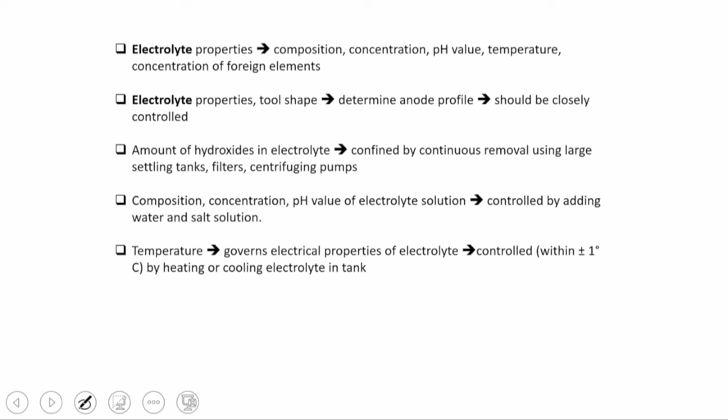So to maintain the constant material removal rate, spacing between the electrodes should be maintained. To maintain the spacing, the cathode moves towards the anode at the same rate at which the machining from the workpiece occurs. Okay, so spacing between the electrodes should be maintained constant. Cathode moves towards the anode at the same rate at which work is being dissolved. Smaller inter-electrode gap results in high current density, which will result in high material removal rate. The selected electrolyte should be inexpensive and easily available; the commonly used electrolyte is sodium chloride.

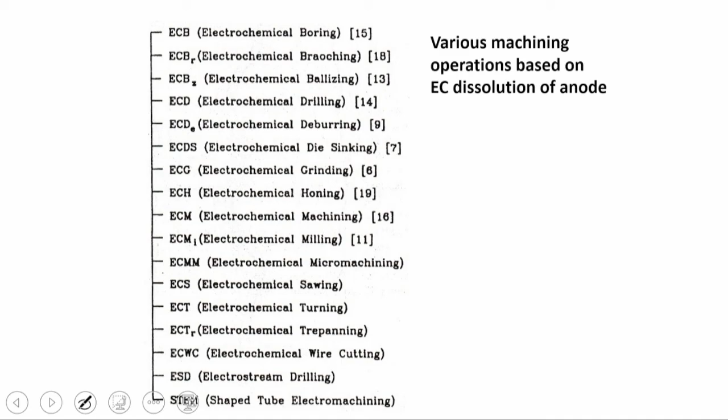Electrochemical milling operation is another process. Electrochemical sawing, electrochemical turning, electrochemical trepanning operation, electrochemical wire cutting operation, electrochemical drilling operation, shaped tube electrochemical machining for high aspect ratio holes. So these are the various machining operations which are obtained by using electrochemical machining process.

So now what are the different components of the ECM process? The first component is the power supply, or power source, of this electrochemical machining process. Then the electrolyte supply and cleaning system is the second element of this process. The tool and tool feed system is the third component of the process. And the workpiece and work holding device system is the fourth component of the process. Now we shall discuss the different elements of the process one by one.

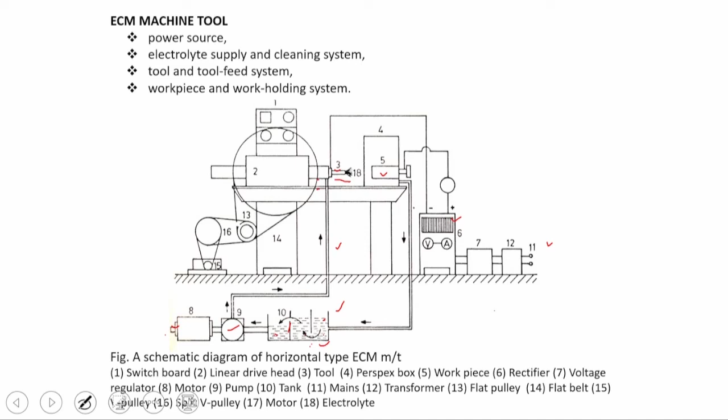Then from the first to the second chamber, there is a filter placed here. Now from the second to the third compartment, it will go through another filter, and at the exit of this filter, it will go to the pipe connecting to the electrolytic chamber.

So electrolyte cleanliness is required to maintain the smooth flow of electrolyte and to avoid blockade of the inter-electrode gap by particles carried by the electrolyte. Electrolyte cleaning is normally done with the help of filters made of stainless steel or any other anti-corrosive material. Filters are periodically cleaned for their proper functioning.

Filters can be placed in the supply pipe just prior to the work enclosure to achieve good results. The piping system should not introduce any foreign materials like corroded particles, scales, or pieces of broken seals. Piping systems are made of stainless steel, glass fiber reinforced plastics, plastic lined mild steel or similar other anti-corrosive materials.

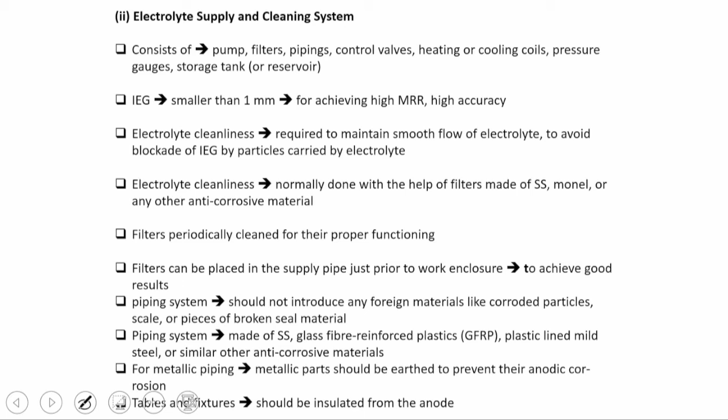For metallic piping, metallic parts should be earthed to prevent any anodic corrosion. So any metallic part should be earthed. Table and fixture should be insulated from the anode. The minimum capacity of electrolyte is 500 gallons for each 10,000 amperes of current.

A single tank system is not recommended because of loss of time and wastage of electrolyte during draining, cleaning, mixing or filling of new electrolyte in the tank. It results in higher cost, poor accuracy of electrochemically machined components and poor control of operating conditions. Concrete tanks or swimming pool type tanks are preferred because of their low cost, easy maintenance and reliability.

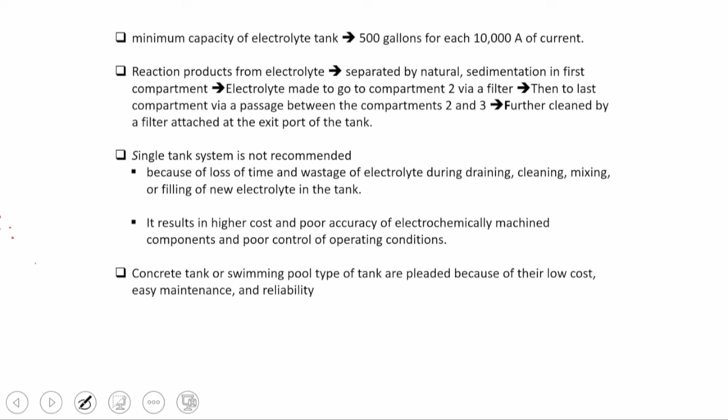Tool and tool feed system: the tool is fed towards the workpiece because material removal is due to the anodic dissolution of the material. So you have to feed the tool towards the workpiece at the same rate this anodic dissolution is going on. Tools and fixtures should be made of anti-corrosive material to work for a long period of time in the corrosive environment of

electrolyte. Tool material should have high thermal conductivity, high electrical conductivity and easy machinability, as it directly affects workpiece accuracy and surface finish. Very soft materials are used for the tool in ECM because there is no wear of the tool material. So aluminum, brass, bronze, copper, carbon, stainless steel and monel are the materials used as tool material.

Insulation of the tool is required. Those areas of the tool where ECM action is not required are insulated. Lack of insulation on the sides of the die sinking tool causes unwanted machining of the work and results in loss of accuracy of the machined workpiece. So which type of tool can be recommended? Either these tools may be coated to remove the unwanted metallic dissolution at the side of the workpiece, or you can use a bit type tool.

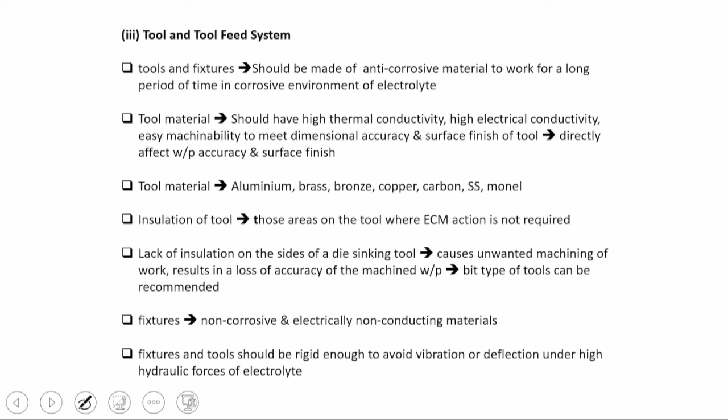You can see this is the bare tool, this is the coated tool, coated outside, and this is the bit type tool. This is the perspex body. Here a through hole is there, and through this hole the wire is coming inside at the bottom surface of the bit. There are different zones: 5 is the stagnation zone, 6 is the front zone, 7 is the transition zone, 8 is the side zone, 9 is the tapered side, and 10 is the tool bit.

Here you can see the bit type metallic tool is attached. This is non-conducting material, this is the conducting material, and it is attached to the non-conducting material using this kind of thread. As this portion is made of perspex, a hole is made inside the perspex, and this titanium electrode is inserted and it will touch the tool bit.

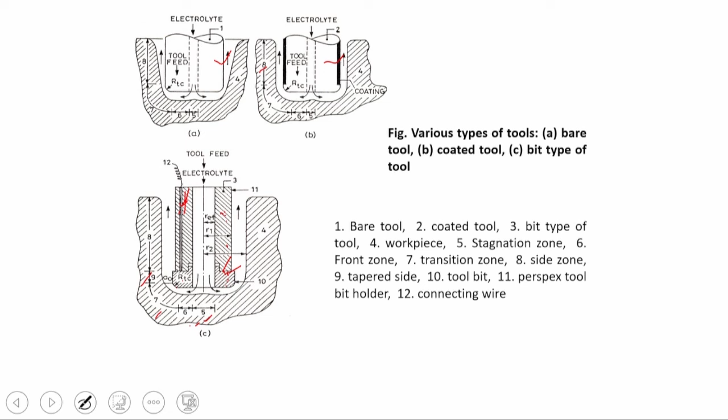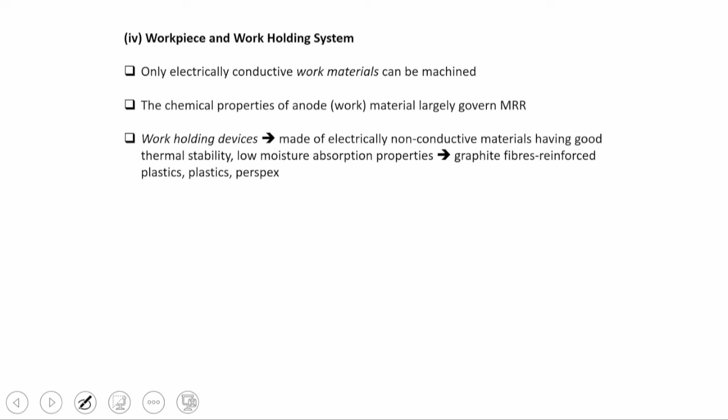Workpiece and work holding system: only electrically conducting workpiece materials can be machined. The chemical properties of the anode material largely govern the material removal rate. Work holding devices are made of electrically non-conducting materials having good thermal stability and low moisture absorption properties, such as graphite fiber reinforced plastics and perspex. These are used for the workpiece and work holding system.

So what are the advantages? It can machine highly complicated and curved shapes in a single pass. Tool life in ECM is very high because practically there is no tool wear, so a single tool can machine a large number of workpieces. Machinability of the workpiece material is independent of its physical and mechanical properties. Low scrap rate, reduced inventory expenses, almost automatic operation, and low overall machining time.

It can machine only electrically conducting workpiece material. These are the disadvantages; a few limitations are there for this process. It can work on electrically conducting material, but for electrically non-conducting material this process is not suitable.

So machined component accuracy depends on the tool design, degree of the process control imposed, and complexity in the shapes produced. So machining of materials consisting of hard spots, inclusions, sand and scale that are present presents some practical

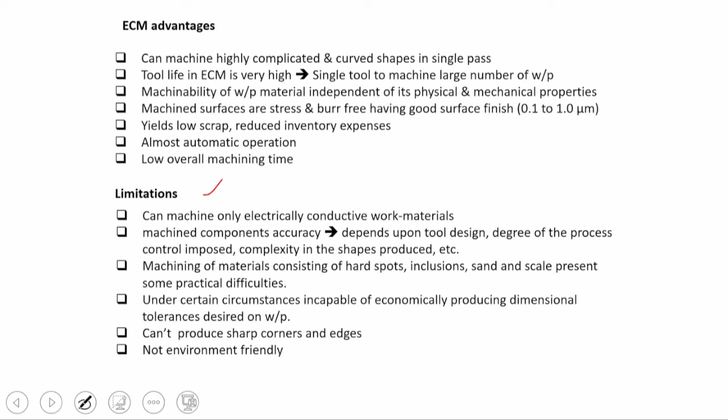difficulties. Under certain circumstances, it is incapable of economically producing the dimensional tolerances desired on the workpiece, cannot produce sharp corners and edges, and is not environmentally friendly, because chemicals are used. Also, sharp corners and edges cannot be produced in the case of the electrochemical machining process.

So what are the applications of the ECM process? It is used for machining very hard materials, high strength temperature resistant materials. Also it is used for machining very complex contours on the workpiece surface, which is not possible with conventional machining processes. So machining of hard and tough materials, especially with complex contours.

ECM is used for turning, trepanning, broaching operations, grinding operation, fine hole drilling operation, die sinking operation, piercing operation, deburring operation, and plunge cutting operation. So many operations can be done by this ECM process. So it is widely used in industries. Commercial machines are available in industry.

So it is used in aeronautics, nuclear technology, space vehicles, automobiles and turbines. These are the industries where ECM machines are extensively used. Typical ECM applications: it is used for machining of turbine blades, which are made of high strength temperature resistant material. You can see that on turbine blades there are so many complex surfaces. How to machine them by normal conventional machining processes?

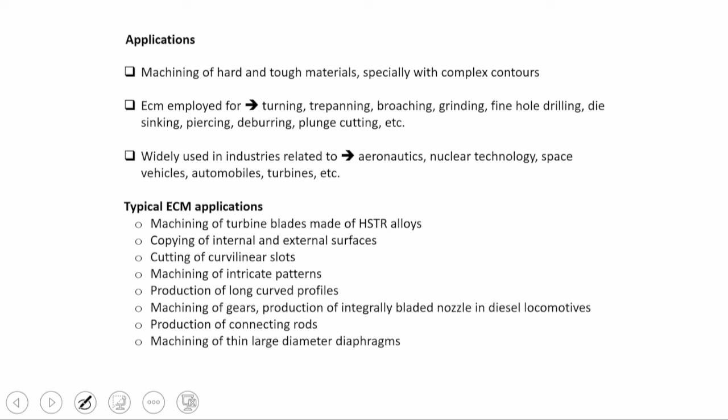Machining of gears, production of integrally bladed nozzles in diesel locomotives, production of connecting rods, machining of thin, large diameter diaphragms. These are some applications of the electrochemical machining process.

So now, what will be the mechanical properties for this ECM process? In conventional machining processes, you know, compressive residual stress is generated. Because of this compressive residual stress, the fatigue life of the workpiece is increased. Okay. So in the ECM process, hydrogen bubbles are generated, so there may be chances of hydrogen embrittlement in the workpiece surface.

But we have discussed that hydrogen gas is generated at the cathode surface, not at the anode surface. The anode is basically used as the workpiece. As it is not generated at the anode, there is no chance of hydrogen embrittlement in the workpiece. So no effect on ductility, yield strength, tensile strength, ultimate tensile strength, micro hardness. These things do not change in the ECM process.

These mechanical properties like ductility, yield strength, ultimate tensile strength, micro hardness do not change in the workpiece surface. Surface layers damaged during conventional machining can be removed. So what about the surface layers? I told you compressive residual stresses are generated, and because of this, in conventional machining the outer layer becomes very hard. Okay. So this surface layer damaged during conventional machining can be removed by the ECM process.

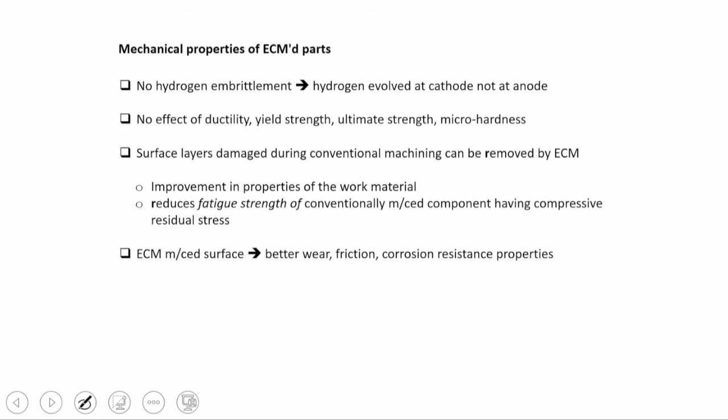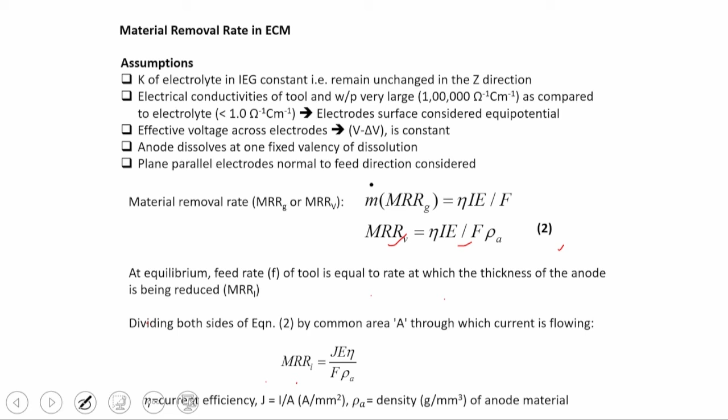Now linear MRRL equals the penetration rate or rate of change of the inter-electrode gap, or you can write this one as dy/dt. So in this equation you can write MRRL equal to dy/dt, minus f. So dy/dt, the linear material removal rate, on the right hand side is J E eta by F rho, which is already there.

Now during ECM, the tool is moved towards the workpiece at a rate of f millimeter per second. So the effective rate of change of inter-electrode gap is given by dy/dt equal to J E eta by F rho minus f. Now for the equilibrium condition, dy/dt equals 0. So you can write for the equilibrium condition J E eta by F rho minus f equal to 0, because there is no change in the inter-electrode gap at equilibrium.

So you put it as 0 here, and it becomes J E eta by F rho equal to f, the feed rate. Now put J as V minus del V into K by Ye, where Ye is the equilibrium gap. Put it in E eta by F rho equal to f, and after simplification you will get the equilibrium gap. So this Ye is the equilibrium gap between the tool and workpiece.

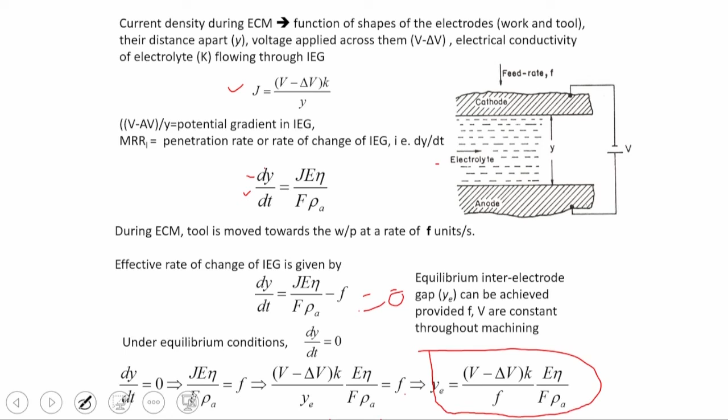So equilibrium inter-electrode gap y can be achieved provided f and v, feed rate and voltage, are constant throughout the machining. So y can be calculated as (V minus ΔV) into k into E into eta by F into f rho a. So from this equation you can calculate this equilibrium gap.

Now inter-electrode gap in ECM. A similar equation I can write here: dy/dt equal to E (V minus ΔV) into k by F rho a into y, minus f. Now in equilibrium condition this dy/dt will attain a value of 0. So now this E (V minus ΔV) into k by F into rho a can be considered as a constant.

So we can write dy/dt equal to C by y minus f, where C is the machining constant. It is constant for a particular work and electrolyte combination only if V minus ΔV and k remain constant during the process. We have considered this: total applied potential is constant, and also electrolyte electrical conductivity is constant between these two electrodes. So now we can write dy/dt equal to C by y minus f.

So now there are two conditions: one is finite feed rate and another one is zero feed rate. Your machining is going on, so you can give a feed to the tool with a finite feed rate, or the tool may be kept fixed, f equal to 0. So in actual practice, two cases are there: zero feed rate f equal to 0, and finite feed rate f not equal to 0.

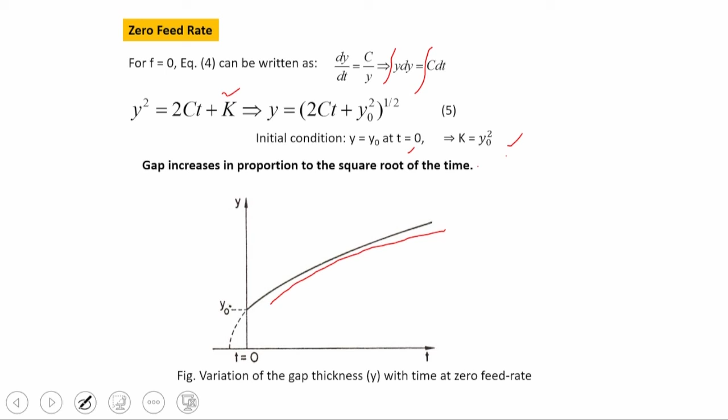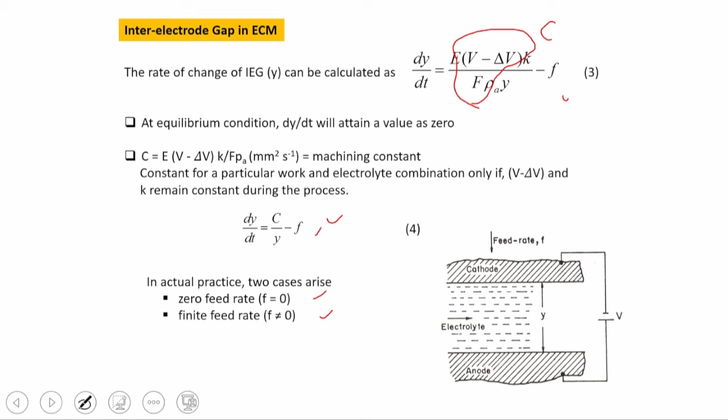So here if we put dy/dt equal to 0 for the equilibrium condition, with a finite feed rate f not equal to 0, the interelectrode gap at equilibrium will remain constant, and y equal to ye equal to C by f. The interelectrode gap always tends to attain an equilibrium value during the electrochemical machining process.

For making a generalized analysis, some parameters are made dimensionless. So y is non-dimensionalized: y dash equal to interelectrode gap y by equilibrium interelectrode gap. We already calculated this equal to C by f, so it becomes yf by C. Time is also non-dimensionalized: t dash equal to t by (ye by f). It means how much time is required to machine the interelectrode gap.

So t equal to t dash equal to t by ye by f. T by ye, already we know, is c by f. So it will become t into f square by c. Now y dash equal to yf by c. Now we can get y equal to cy dash by f. Now t dash equal to t into f square by c. Now we will get t equal to ct dash by f square.

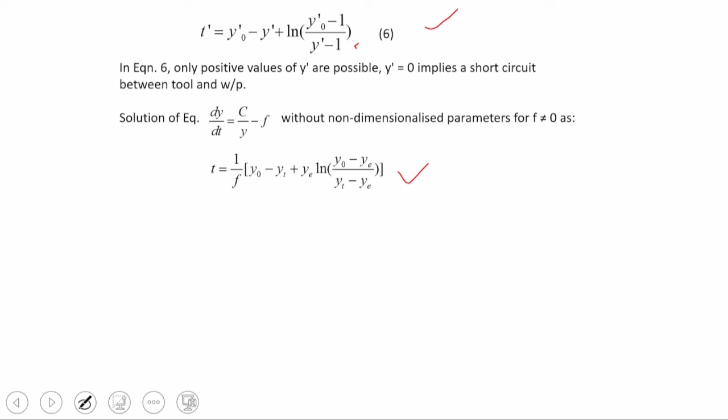Now in equation 6, only positive values of y dash are possible, because y dash equal to 0 implies a short circuit between the tool and workpiece. The solution of dy dt equal to c by y minus f for non-zero, finite feed rate without non-dimensionalization is: t equal to 1 by f, y0 minus yt plus ye ln of y0 minus ye by yt minus ye, where yt is the gap at time t. So you can calculate t dash with non-dimensionalization, or t without it.

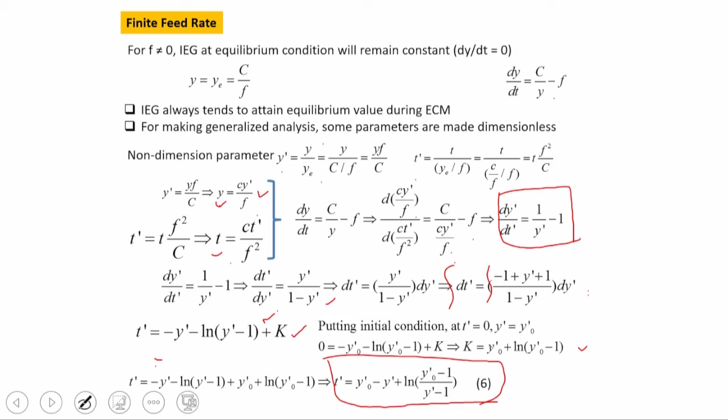So y dash is asymptotic to y dash equal to 1, or linear material removal rate is equal to the feed rate, or y equal to ye. Whatever initial inter-electrode gap you take, the linear material removal rate will take the value of the feed rate, and the gap will achieve the equilibrium inter-electrode gap. This is called the self-regulating characteristic of the ECM process. There are three cases: feed rate equal to, greater than, and less than the linear material removal rate.

So in the first case, when feed rate is equal to the linear material removal rate, stable machining will take place, and in that case the inter-electrode gap is equal to the equilibrium gap. And in the second case, when feed rate is less than linear material removal rate, we are not giving the same feed as the machining that is going on from the workpiece. So you are giving less feed.

So in that case, what will happen? The gap between the tool and workpiece will increase. If the gap between tool and workpiece increases, then current density will decrease. If current density decreases, then machining rate or material removal rate will decrease. So if material removal rate decreases, the difference between the linear material removal rate and feed rate will decrease, and ultimately the linear material removal rate will take the value of feed rate.

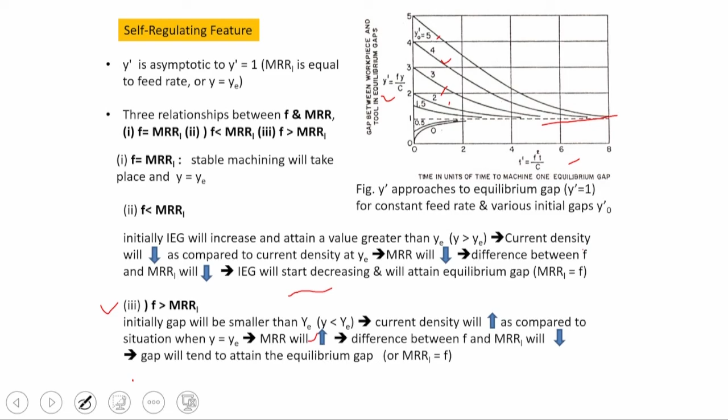Or initially this gap will be smaller than the equilibrium gap YE, Y less than equilibrium gap. Current density will increase as the gap reduces, as compared to the situation when the interelectrode gap is the equilibrium gap. So if current density increases, your material removal rate will increase, and the difference between the feed rate F and linear material removal rate will become small, and that's why the gap will tend to attain the equilibrium gap, or linear material removal rate will become F. So this is the self-regulating characteristic of the ECM process.

So now the generalized equation for this interelectrode gap is dY/dt equal to C by Y minus F. In that equation, for F equal to 0, we have seen that for an infinite value of t, this interelectrode gap also increases infinitely, non-linearly. So it is not the practical case. Practically, if we increase the time with a zero feed rate, this interelectrode gap will increase, and after some time machining will stop. There will not be any electrochemical machining, because a minimum interelectrode gap should be maintained for the machining to take place.

And for the second case, in non-dimensional form t', when there is a finite feed rate, this is the implicit form of the equation. To solve this implicit form, we have to take help of numerical analysis, such as the finite difference method, finite element method, or boundary element method.

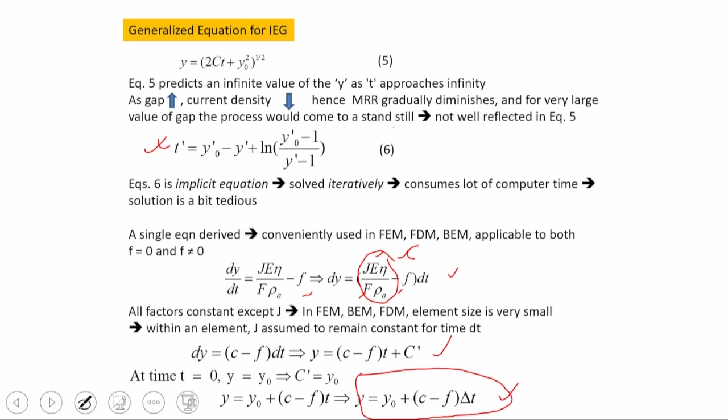So this single equation can be used for both the cases of finite feed rate and zero feed rate. And also it takes very less computational time to calculate the inter-electrode gap between cathode and anode.

Now in some cases the cathode and anode are inclined at an angle theta to the feed rate. So this is the cathode and this is the anode, inclined at an angle theta to the feed rate. In that case, you have to take the component of the feed, f cos theta instead of f. When theta equal to 90 degree, f is normal to the workpiece, so the feed is 0, and the condition of f equal to 0 will apply.

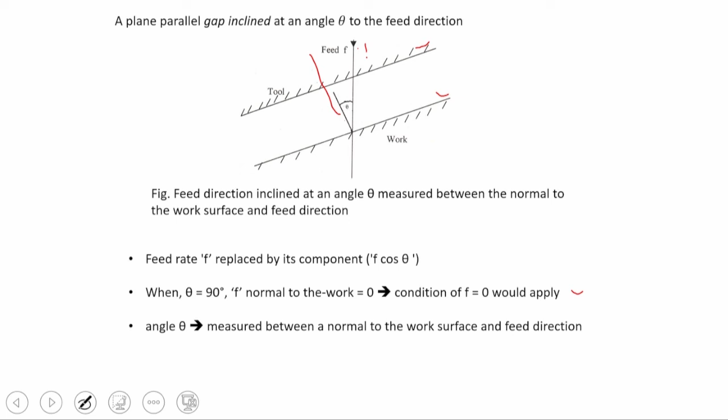Angle theta is measured between the normal to the workpiece and the feed direction. So this is the feed direction, this is the normal to the workpiece, and this is the angle theta.

Now how to calculate the maximum permissible feed rate in electrochemical machining process? The volumetric material removal rate can be calculated as E I eta by 96,500, the value of F, Faraday's constant, by rho a. Eta is the current efficiency. It is almost 100% for aqueous solution of NaCl as electrolyte.

It is lower than 100% when we take nitrate or sulfate as the electrolyte, and it is more than 100% when electrically non-conducting inclusions are there in the anode. Suppose these electrically non-conducting inclusions are there. This material is not removed by the ECM process, but when the outside material is removed by ECM, this one also will be removed automatically.

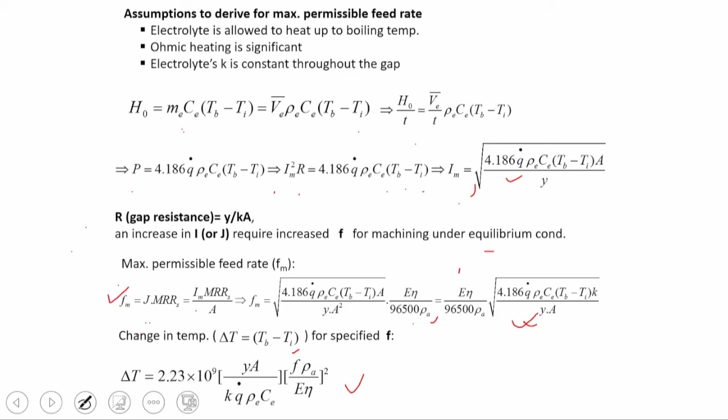So electrolyte conductivity is a function of temperature of this electrolyte, and also a function of presence of bubbles, hydrogen gas, and contamination by the sludges, because sludges contaminate the inter-electrode gap. So if more sludges are there, electrical conductivity of this electrolyte will change. Presence of bubbles also will reduce the electrical conductivity of the electrolyte.

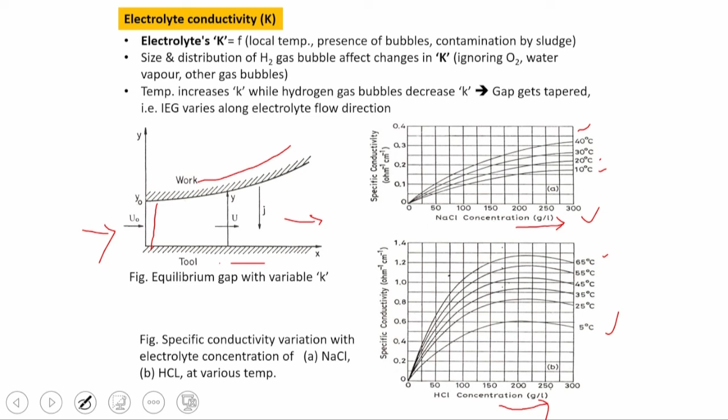So the electrolyte is flowing at u0 velocity. At the downstream direction, if you see, the inter-electrode gap actually varies. Suppose this is the tool here and this is the workpiece here. The workpiece is moving towards the tool. Initially this gap is y0. Now you can see this gap varies between tool and workpiece because the electrolyte is flowing. So in the downstream direction you will see a concentration of hydrogen gas bubbles.

So now, effect of temperature on the electrolyte's electrical conductivity. Here, heat generated due to the viscous flow of electrolyte, over voltage, and chemical reactions, we are not considering. Heat transferred through the electrodes is also negligible.

So now using the conservation of heat, temperature gradient along the electrolyte flow path: U, the flow velocity of this electrolyte, into rho E C into del T into Y equal to I square R. So here the same thing we are using.

Now we can consider I equal to V minus del V square into K by Y into dx. Now we put R equal to Y by K. So after putting this, it will become in this form: dT/dx equal to V minus del V square into K U rho E C into Y square. So now V minus del V square U0 rho E C by Y0 square, we can consider this one as a constant. So we can write it A, and here ultimately we can write it A into K.

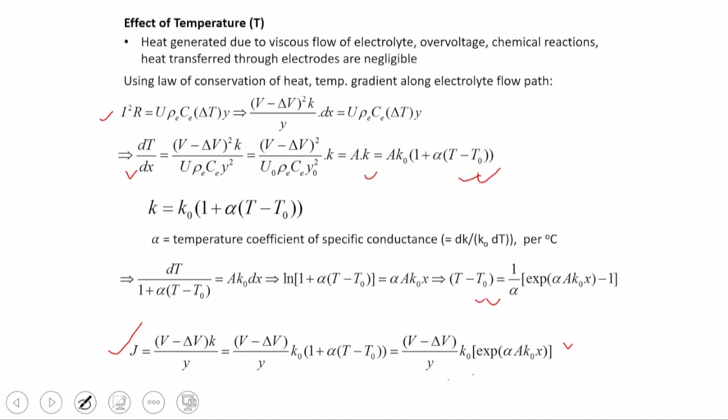So, effect of hydrogen gas bubbles on K. To accurately predict the variation in the inter-electrode gap along the electrolyte flow path, consider the effect of hydrogen gas bubbles and presence of sludge on K. For quantitative analysis of the effect of sludge on the electrolyte electrical conductivity, there is no reference in the literature. So the effect of sludge on the electrical conductivity of this electrolyte is not considered here. Only the effect of hydrogen gas bubbles on the electrical conductivity of this electrolyte is considered here.

So the rate of evolution of hydrogen gas bubbles at the cathode surface is governed by the current density on its surface. Hydrogen gas bubbles are swept away by the flowing electrolyte, so their mass concentration is more in the downstream direction. So hydrogen gas bubbles decrease K, the conductivity of this electrolyte, and the local anodic dissolution rate decreases. So as hydrogen gas bubbles evolve, the electrical conductivity of this electrolyte decreases, and anodic dissolution also decreases. It is governed by the size and distribution of the hydrogen gas bubbles in the inter-electrode gap.

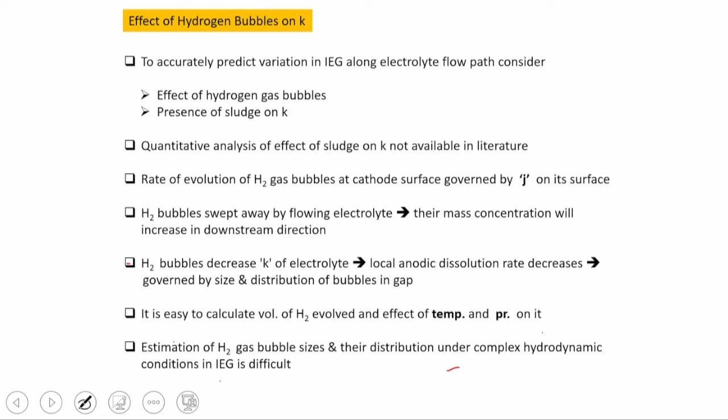So it is easy to calculate the volume of hydrogen gas evolved and the effect of temperature and pressure on it. Estimation of hydrogen gas bubble sizes and their distribution under complex hydrodynamic conditions in the inter-electrode gap is difficult. So these are the conclusions of qualitative studies by Landolt et al. 1970 and Hopenfeld and Cole 1966 and 1969. They propose that bubble layer thickness increases in the downstream direction along the gap, however, decreases with increased electrolyte flow rate. If we increase the electrolyte flow rate, then hydrogen gas bubble concentration will decrease, and this concentration is more in the downstream direction.

So individual bubble sizes decrease with the increase in electrolyte flow velocity, pressure, or both, and increase with increasing current density. If we increase the current density, the size and concentration of hydrogen gas bubbles also increase. And it decreases with pressure and with increase in electrolyte flow velocity. Gas bubbles are concentrated near the cathode, not dispersed uniformly throughout the inter-electrode gap. Gas bubbles may also form due to the evolution of oxygen at the anode and due to cavitation phenomena, but it is not considered here.

So to incorporate the effect of temperature and hydrogen gas bubbles on the electrical conductivity of this electrolyte, K is equal to K0 into 1 plus alpha into del T, the temperature effect, into 1 minus alpha b whole to the power n. So this term is multiplied along with the existing term here. Here alpha b is the void fraction, n is the exponent. The value of this exponent depends on the distribution of the voids in the inter-electrode gap. For uniform distribution, n is 1.5. For non-uniform distribution, when the bubbles concentrate near the cathode, n equal to 2. For the average case, n equal to 1.75 is considered for most cases.